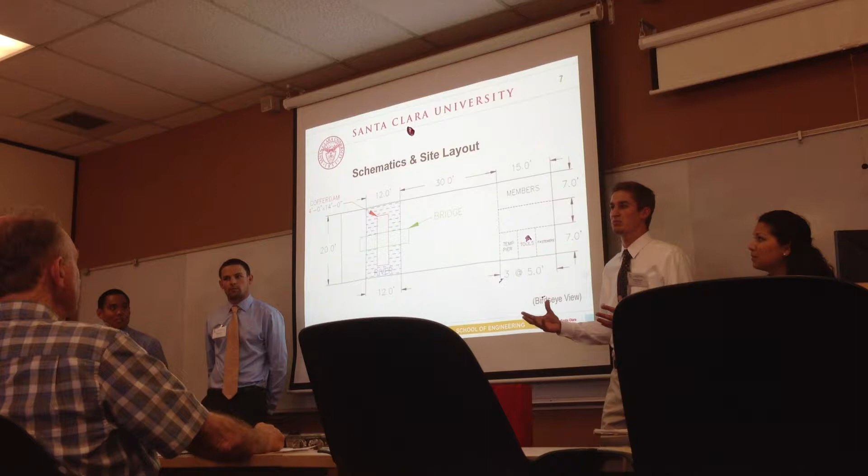Now Scotty will talk about the competition details. All right, thank you, Sylvia. So the goal of the competition is really to represent a steel bridge, a real-life size project, in a scaled model version. So all the other elements in the project, the members, tools, fasteners, construction site, are all scaled.

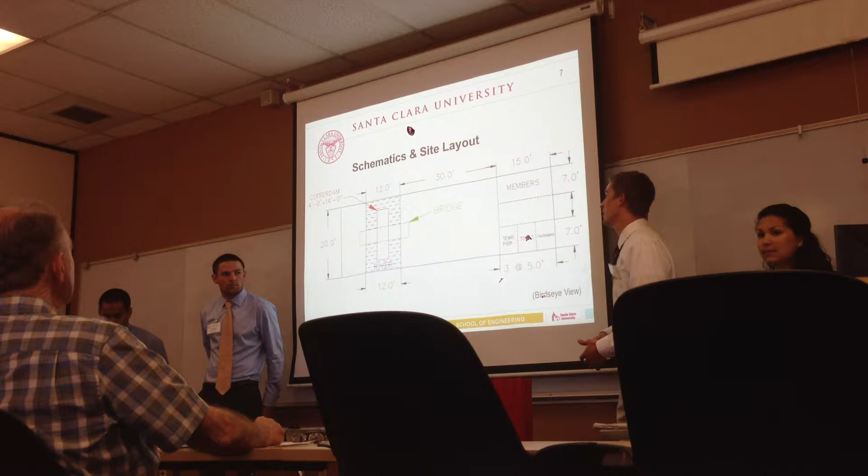So as you can see here, this is the site layout for the actual competition, a 66 by 20 foot layout, with members, tools, and fasteners having specific areas in which they're supposed to be. The bridge gets built over a 12-foot river with a 4-foot coffer dam in the center. During the competition, members are brought over one by one to the construction area, with builders being able to stand on either side of the river or actually in the coffer dam.

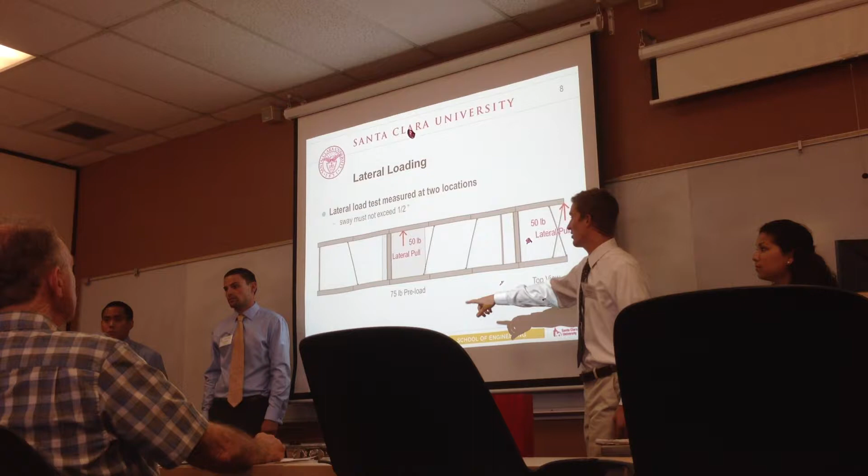So once the bridge is built, you go into structural loading, first with lateral loading. A 75-pound preload is located on the center of the bridge to really stabilize the bridge during loading. Once the bridge is deemed stable, there are two 50-pound lateral pulls at the center of the bridge and at the cantilevered section. These tests help to determine whether the bridge is stable for vertical loading, whether there will be any torsional, lateral torsional effects, etc.

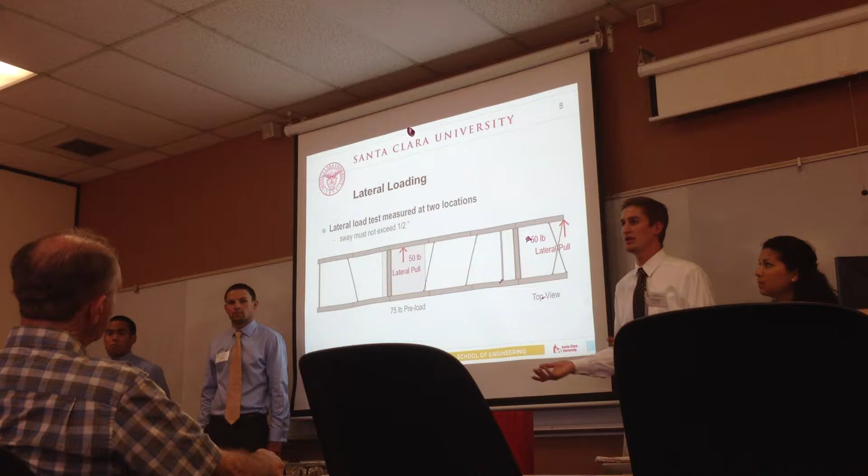So this is really a pass-fail type scenario for loading. Once you do pass it, you go into vertical loading, which we did pass.

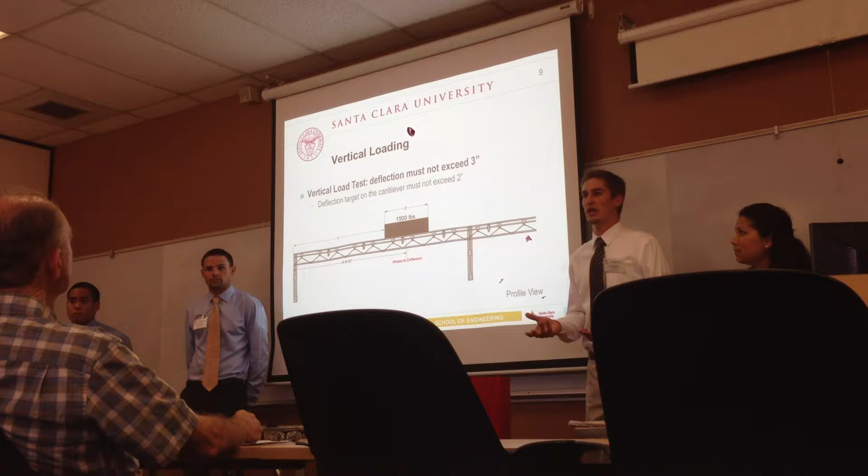And they load the bridge with 2,500 pounds. First being the 1,500 pounds located 7 feet away from the end of the main span of the bridge. This was our most critical loading case. This was before the other 1,000 pounds was loaded on, but this created our maximum moment throughout the bridge. This is what we designed all our elements for our bridge for. So this was our big case.

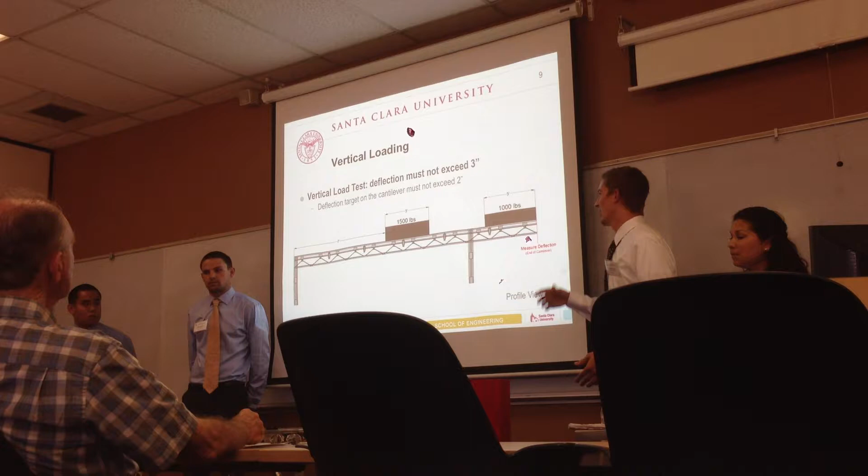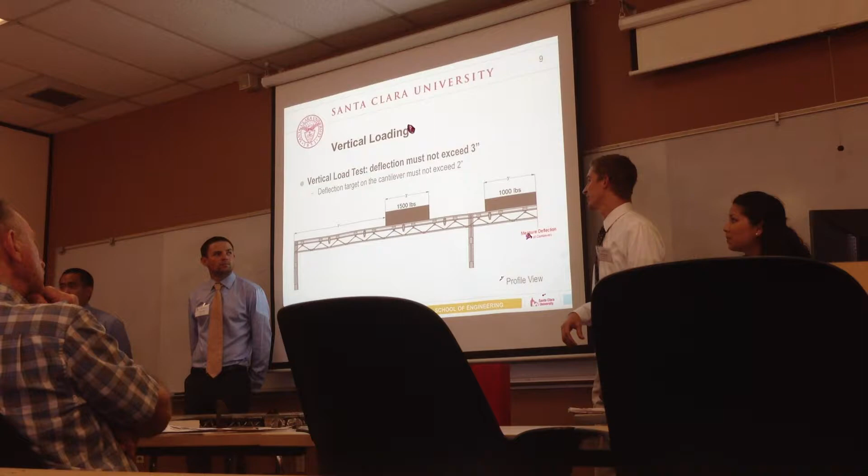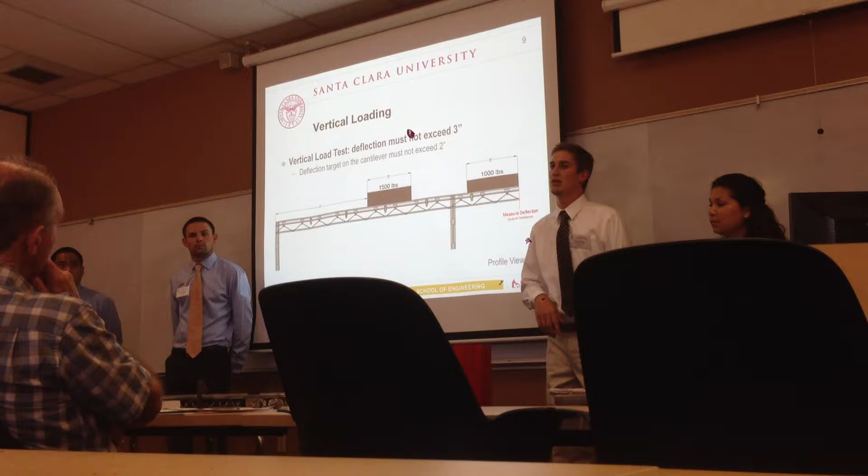Once we passed, we were relieved and put another 1,000 pounds on the end of the cantilever section, which induced a little more shear, but kind of reversed the moment, so we were pretty safe with what effects would be occurring in the bridge. During the competition, they measured deflection in 2 cases on the cantilever section and 1 in the main span. And so what does this all mean? How do you quantify all this data?

So it gets all worked into 2 equations, construction cost and structural efficiency. During the competition, you're put against the clock for build time, with how many builders you can build with. Also, it goes into how you design your bridge. So the total weight of your bridge, how heavy it was, and also what I just talked about, the aggregate deflection of where they measure the vertical loading. That sums to how really well designed your bridge is. So all these factors,

they all get factored into equations, with build time being in minutes and seconds, total weight being in pounds, and aggregate deflection being in inches. You had to factor it some way. So they came up with an overall performance equation, which came down to an overall cost, which is in millions of dollars. Not really our actual cost of our bridge, but it helped you to discern which bridge did better than the other.

We only wish we had that kind of budget.

Yeah. And so now knowing all of this, what do we do? So Ren's going to talk about our team approach and how we designed our bridge. Thank you, Scotty. So as Sylvia mentioned, our past performances in this competition really do not reflect the quality of civil engineers we have here at Santa Clara. So that was sort of our approach this year. We wanted to be competitive not only this year, but for many years to come. So we wanted to develop a bridge that future teams could learn from in our designs and ideas, and really provide a platform which can help them steadily improve each and every year.

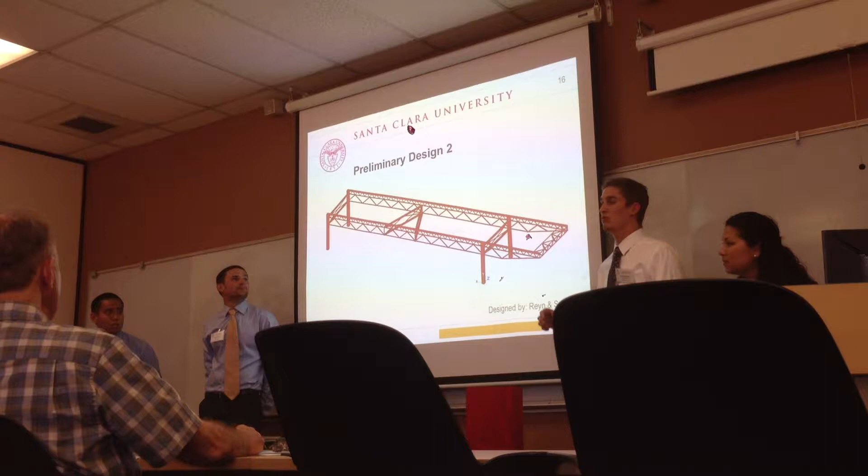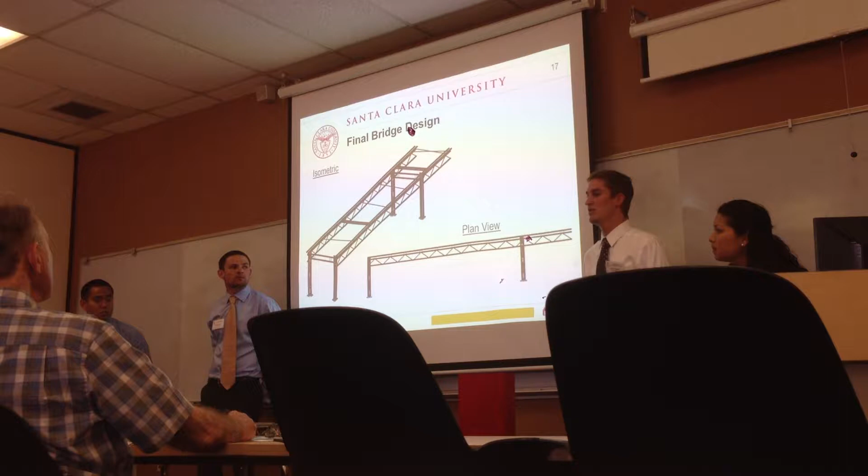The second design was designed after the 2013 specifications and rules, really to create the smallest footprint dimensionally by the rule standards. And then finally, after consideration from outside sources and internally, we designed a final bridge, utilizing our tripod section, our triangular section, as our primary girder, and then really taking the dimensional aspects of the second design. Just some pictures.

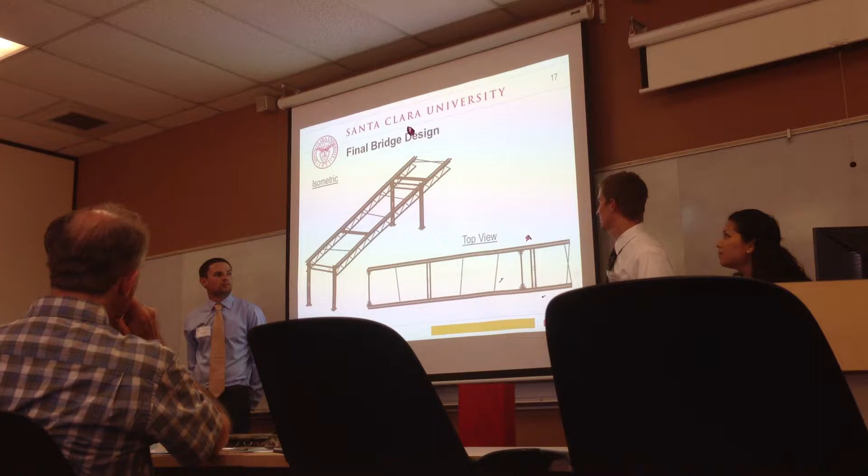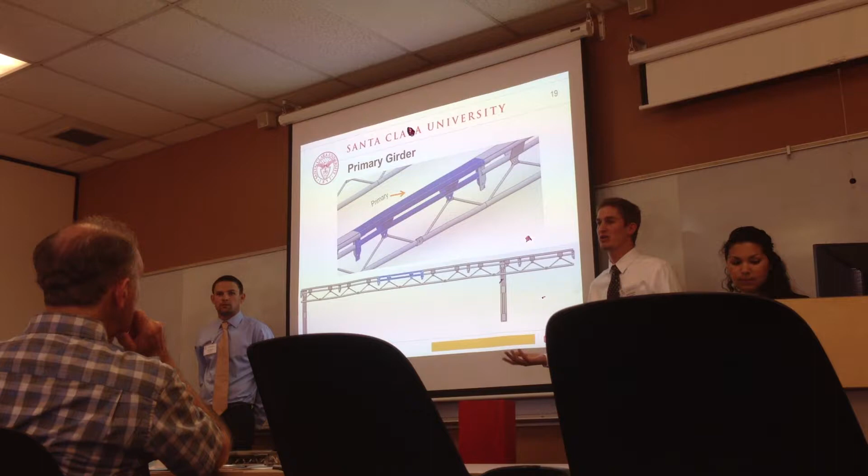And now Jay and I will talk about the finite elements, what went into our bridge. So first, we're going to talk about the primary girder. So why call it the primary girder? Primary girder takes the primary bending loads due to lateral loading. And as you can see here, we actually simplified the design. Here is the new primary girder. Very simplified, used a lot of plates instead of diagonals for simple fabrication.

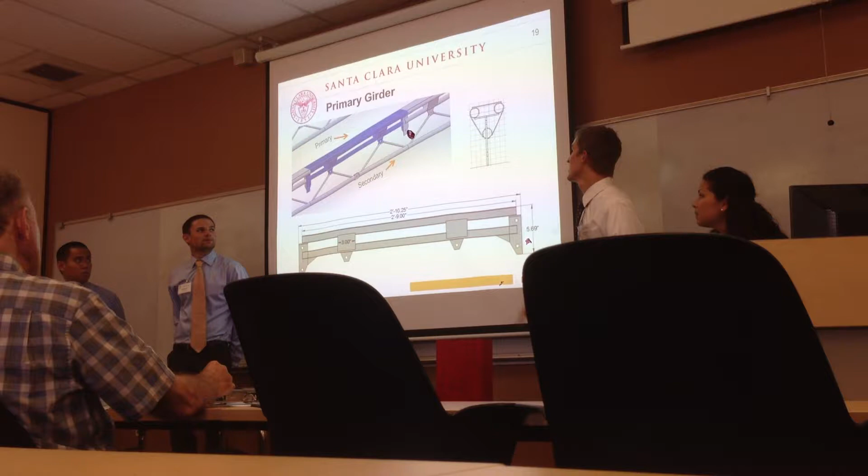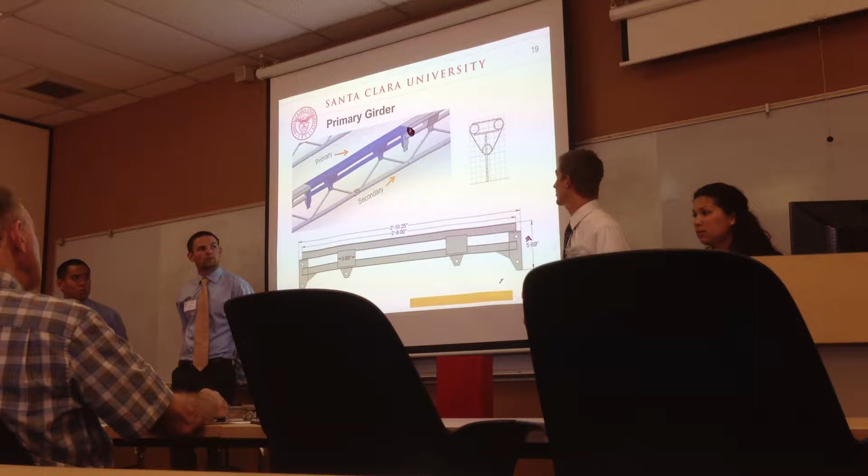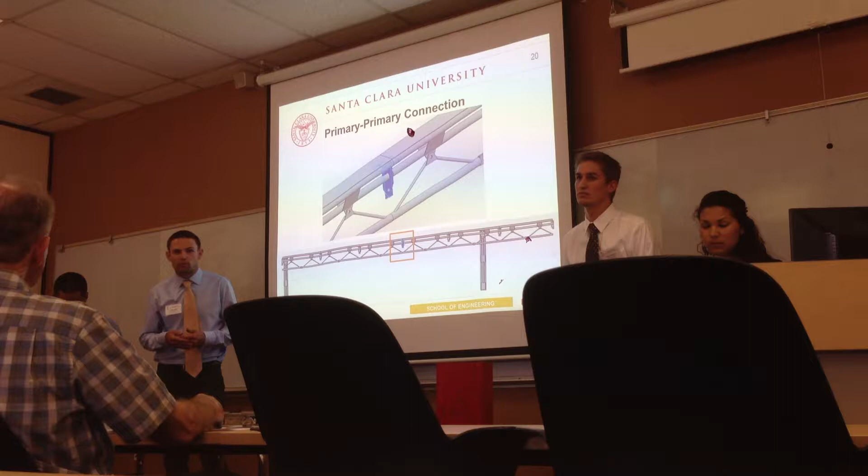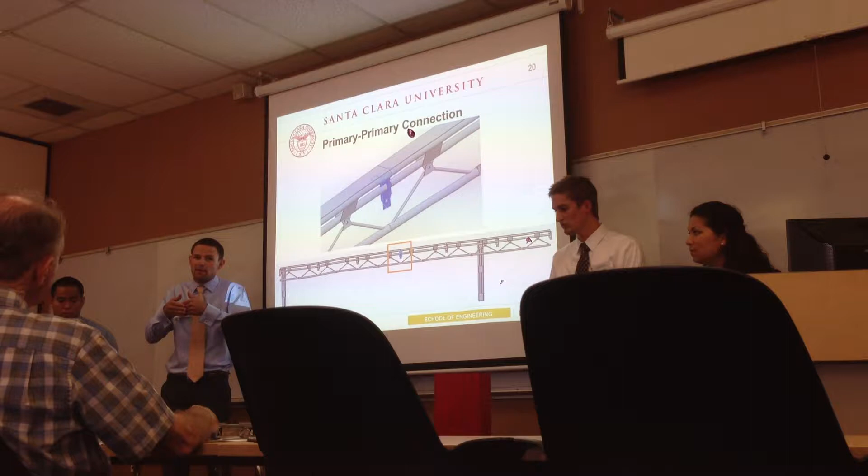So why we designed it this way, the two top tubes of the girder section help to support it laterally, those lateral torsional effects that we were talking about. And then the bottom tube helps to drive the centroid of the section down to really stiffen the member up. So just because we had a relatively stiff primary section, it doesn't really matter if the section is stiff if the connection isn't stiff, because the section might not necessarily bend, but you'll accumulate slip along each one of the connections and you'll still have poor performance.

So we needed a moment-resistant connection to connect the primary elements. So that's what drove us to come up with this style connection. It's relatively simple. It's just 2 bolts in single shear. We wanted the depth of the connection to be relatively large to help drive the eccentricity of the bolts out and minimize the amount of force in each bolt to resist moment.

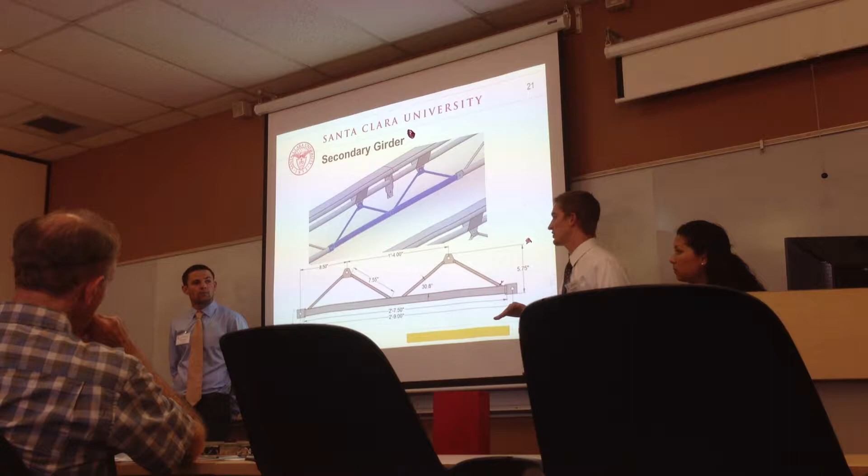So even though we created a very stiff primary girder section, we were still very worried about deflection. Just during testing, we can't really tell what effects might happen. So we designed a secondary girder system to help stiffen our bridge. So driving material away from the centroid, driving that centroid down, and actually created a stiffer bridge by a factor of 16, which was really nice.

So Scotty was talking about the secondary system driving the centroid deeper in the section. And what that really means, the depth from the centroid down to this secondary system, as the bridge starts to bend, the secondary system develops a tremendous amount of tension. And that's really all we designed that secondary connection to withstand. So it's just a single bolt in single shear, and it's meant to very, very close clearance, and it's just meant to resist slipping when the secondary system goes into tension.

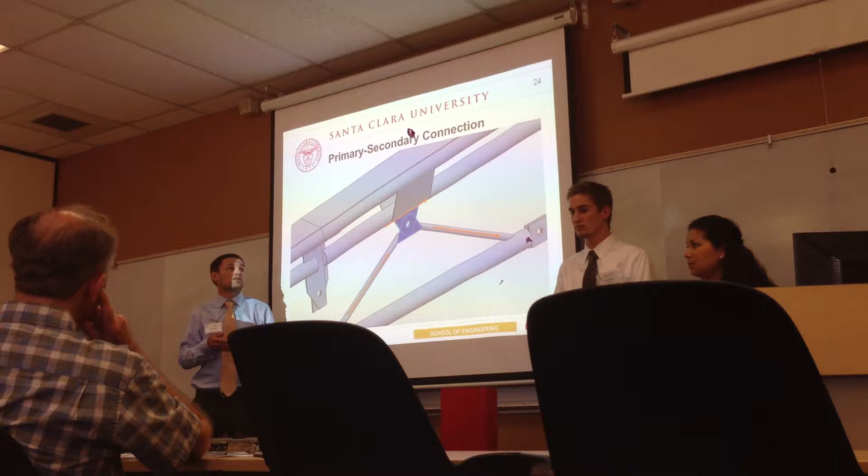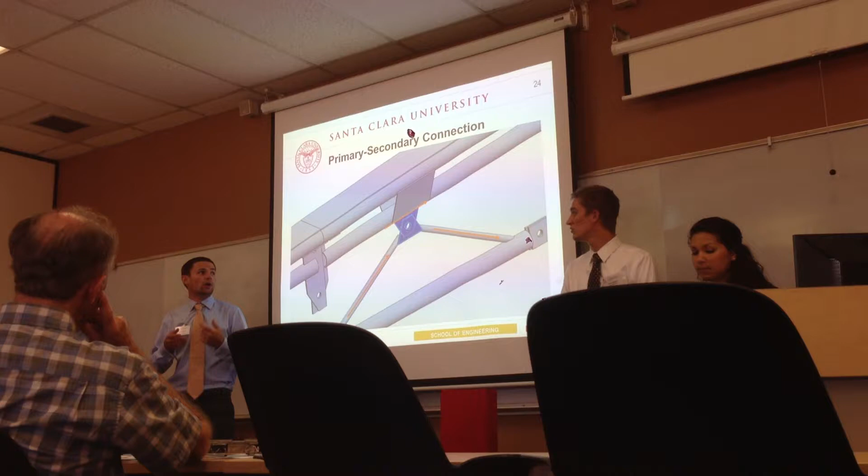So then we also had to connect the secondary system to the primary system. So the secondary system is just a simple truss. When the main span bends, you get tension and compression forces in each one of these little diagonals, and it creates a net resultant shear across the connection to the primary system. So the connection was simply designed to transfer that shear into the primary section. That's also the reason for the shear plates on the primary section in both locations. So relatively simple, just a little trapezoid plate with weld on both sides, and welds are very strong in shear.

So designing all these connections, all these members, we were really happy with our intended performance of our bridge. But we wanted to do one more thing. So for the complete girder system, we actually staggered the primary and secondary members so that we don't get what Jay talked about, deflection from the connection pieces. So we didn't want any accumulated deflection. So wherever there's a secondary to secondary connection, the primary girder is continuous, and wherever there is a primary to primary connection, the secondary is continuous, eliminating that accumulated deflection.

So just because we had a stiff girder system, we needed to continue the load path into the columns and then down into the ground. So once again, we needed a moment-resistant connection, and these connections had to resist a decent amount of load.

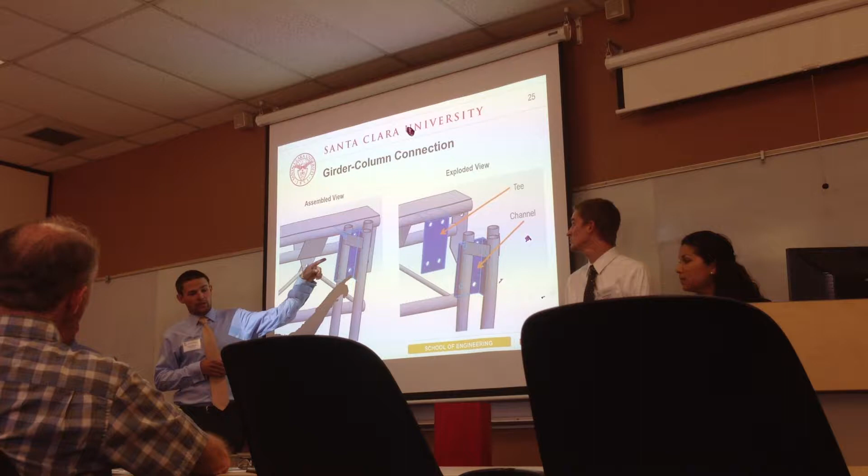So we went with a simple T that gets welded into the primary girder, and then a channel that gets welded onto the side of the column. And then 4 bolts - we had to drive the depth of that plate up to help increase the eccentricity of the bolts and prevent bearing failure at each bolt location.

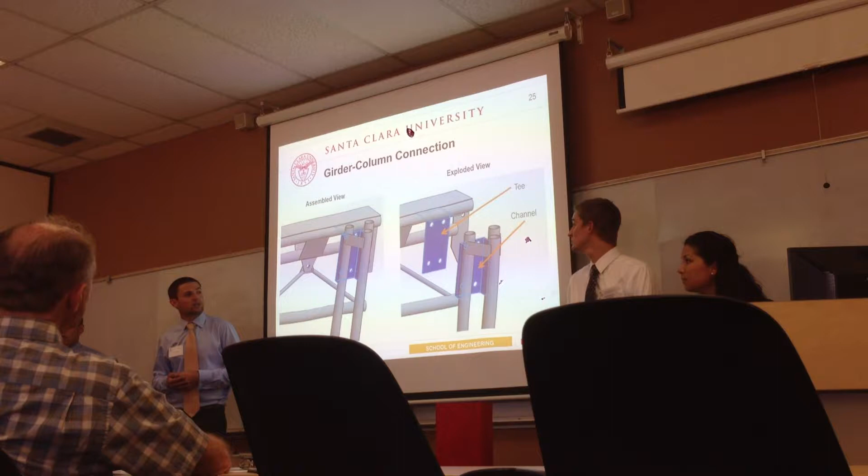As you just saw, there's only 4 kinds of connections in the entire bridge. They're all made with 4130 aircraft grade chromoly steel, and they all use high strength bolts in single shear. So really simple design - we were able to come up with a preliminary design with a sample connection, go to the lab, test, and verify our performance, then iterate to eliminate any behaviors that we didn't like.

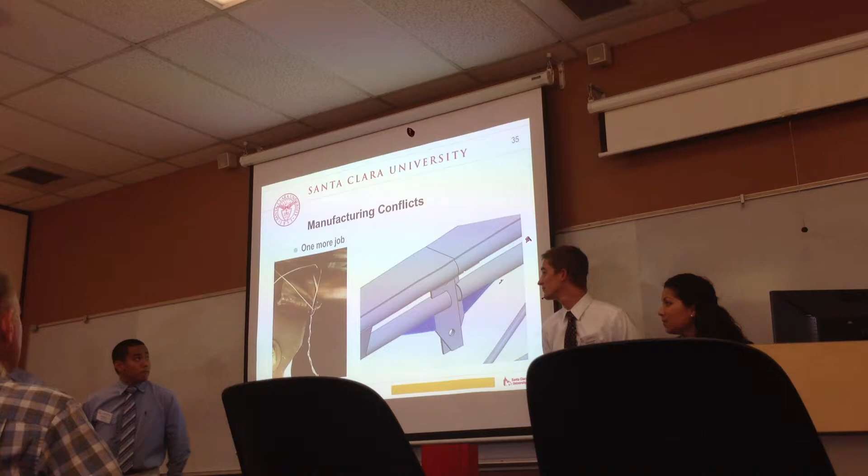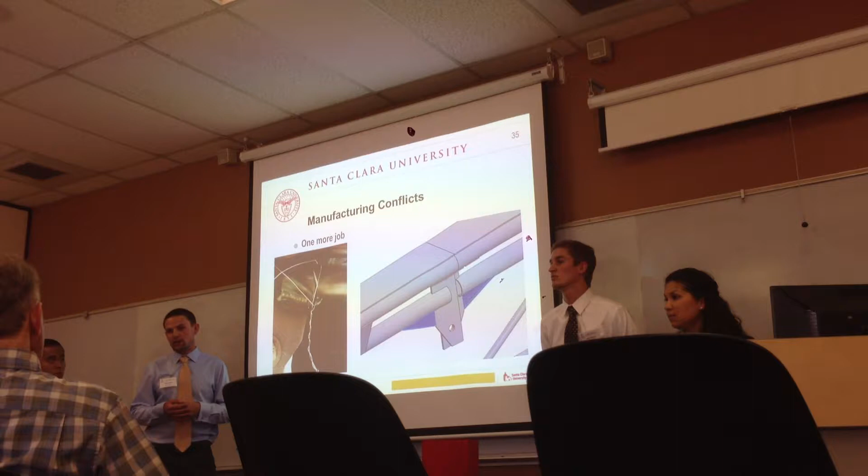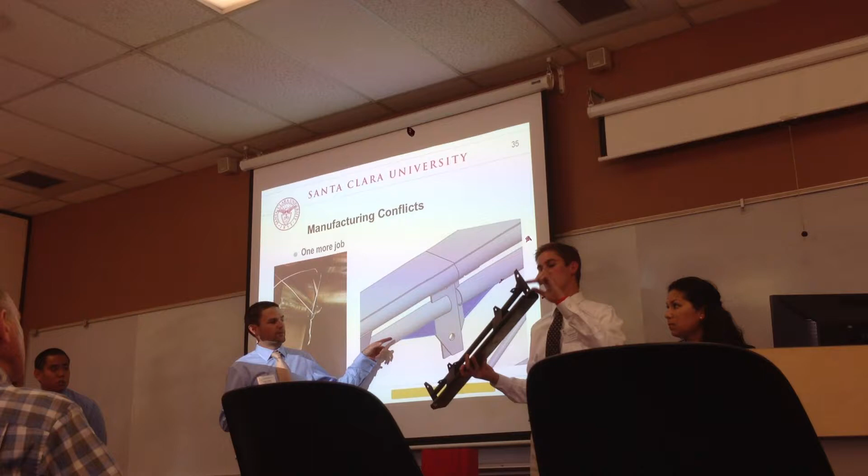So we had our bridge, we had our build team, but there was one more problem. Even though we got rid of that second flange on the primary connection plate, we still saw premature fracture in this bottom tube. So we decided we needed to add some gusset plates only days before the competition. These were going to change the stiffness relatively gradually as you approach the primary connection plate.

So we cut up these little plates and brought the bridge to the weld shop. What could possibly go wrong?

Well, when they added these plates, it pulled the primary plates back 3/32 of an inch. That doesn't sound like a lot, but that put 6 inches of camber in the main span of the bridge. Our secondary system wouldn't fit. We were sunk. So what did we do?

We ended up reaming out each one of the holes to 12 millimeters, all done by hand just a few days before the competition. And Sylvia, the night before, was out coloring all of our 12mm hardware with an orange Sharpie so our build team knew what hardware to put in the new holes.

But we made it to the competition, and we're really happy with how we performed. So we survived that disaster, but our bridge arrived on site in one piece. We were extremely confident going into the competition because of all the hard work we put into practices.